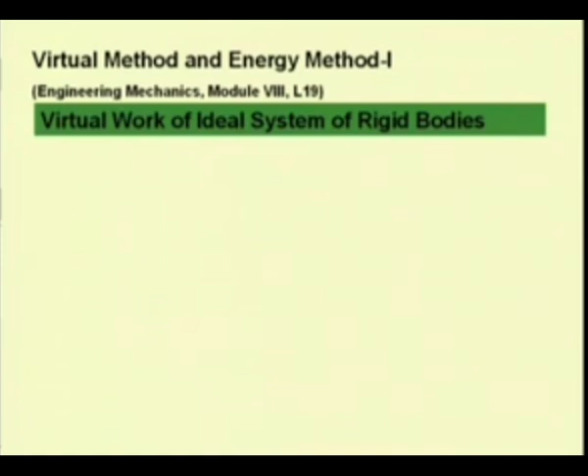Module 8, lecture number 19 of the engineering mechanics course. Before taking up some problems, we will see how to define what we call as the degree of freedom of a system, which defines the number of independent coordinates required to define the position or configuration of a rigid body or a system of connected rigid bodies.

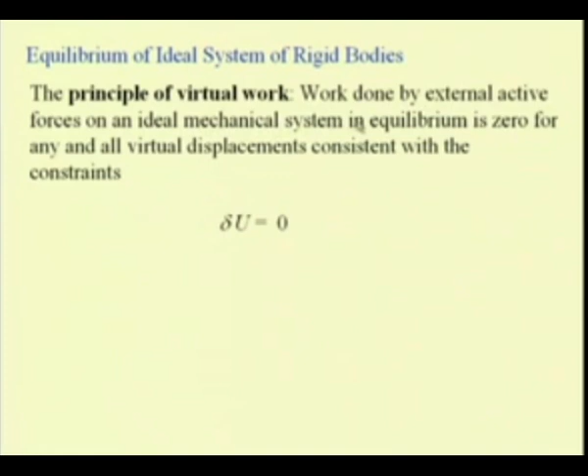Before going into the details, let us recapitulate what we studied in the last lecture. We defined the equilibrium of ideal systems of rigid bodies, as systems which do not absorb energy and also do not dissipate energy because of friction. The principle of virtual work as applied to the ideal system of rigid bodies is that the work done by external active forces on an ideal mechanical system in equilibrium is 0 for all virtual displacement consistent with constraint, that is delta U equals 0.

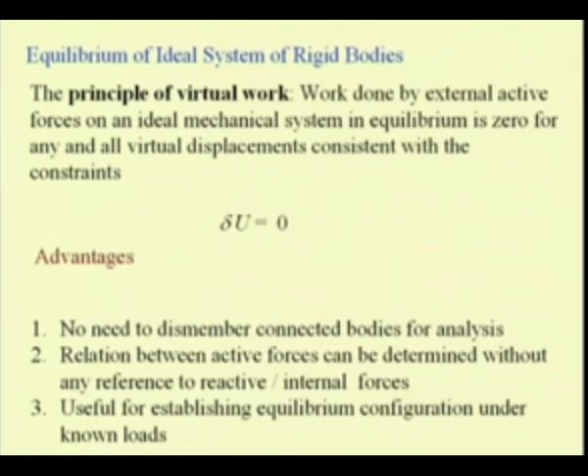We also saw that it is not needed to dismember the connected bodies for analysis. The relation between active forces can be determined without any reference to the reactive or internal forces. That means we do not need to find the reaction forces also, and it is useful in establishing equilibrium configuration under known loads. So we will see some problems in order to realize these advantages.

You should note that we are neglecting friction because we are idealizing the system, assuming that friction does not exist. In case friction is appreciable, it does work and has to be included in the expression. In this case, one has to dismember the bodies to determine friction, and the advantage of the virtual work method is lost, because to determine the internal forces we have to dismember, and once we do that, the advantage of the virtual work method is lost.

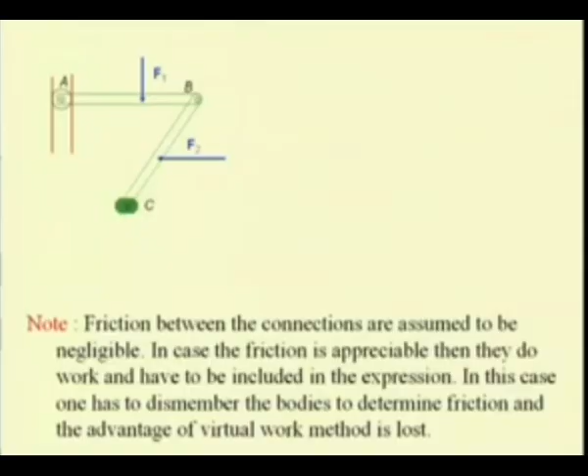Now, let us define what we mean by the degrees of freedom of a system. The degree of freedom is nothing but the number of independent coordinates needed to specify the configuration of a system completely.

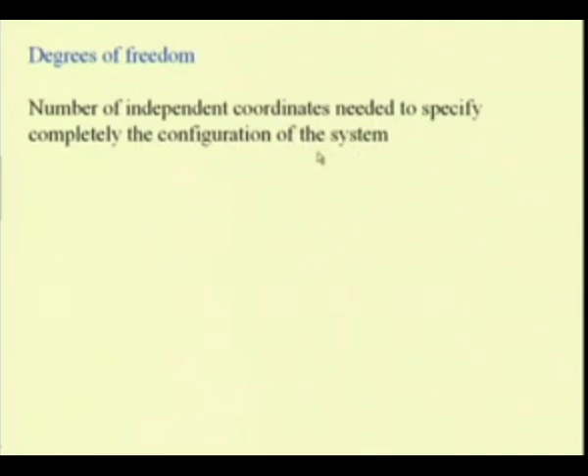Let us take one example of a 1 degree of freedom system, where we define the configuration of the system completely by specifying only one coordinate. Here you see a link BC pinned at C and the link AB connected by a roller at A, with some external forces acting on this system causing the system to undergo displacement.

If we assume that this system undergoes displacement consistent with the constraints, then point A can move along the roller in this direction and take up a new position. Since this is constrained at point C, point B traces a circular path, so any new position B prime will be such that this virtual displacement, because of the application of external forces, is consistent with the constraints. That means point A moves along this direction and this link undergoes a pure rotation.

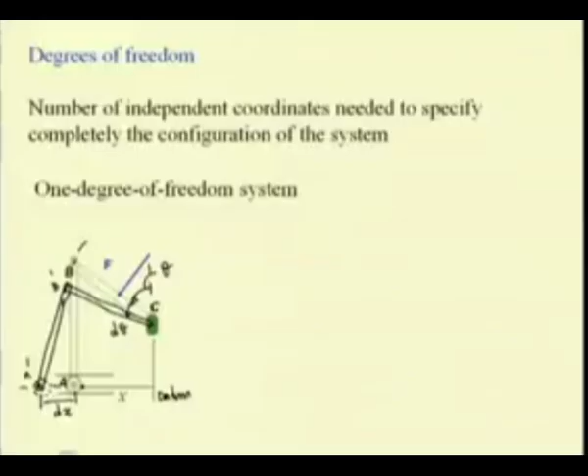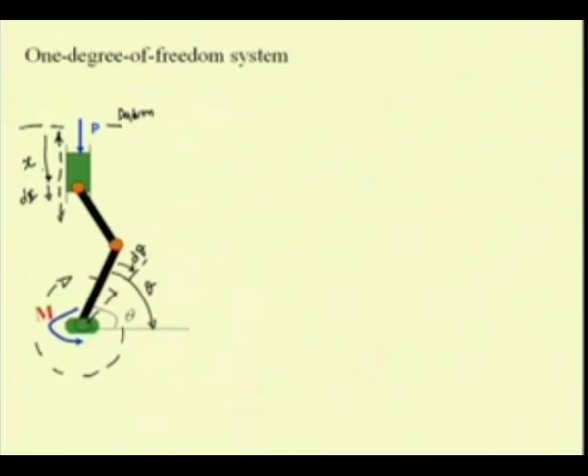So, for any displacement d theta of this link, the displacement dx is known. So, either by specifying theta or specifying x, I can completely define the configuration of this system. So, again this is a 1 degree of freedom system.

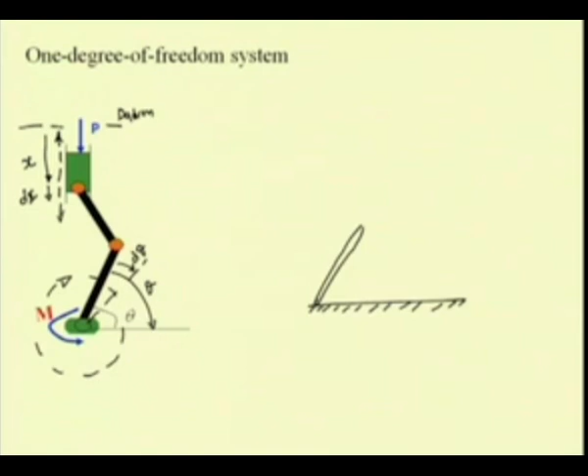We can see another example, which is a 4 bar mechanism. What we call a 4 bar mechanism, where position A is fixed, and A and D, these 2 points are fixed, and this link AD is also fixed, because its orientation as well as the distance between A and D is fixed. So, if this is my crank or input link, its angle is theta, and these link lengths are constant because these links are rigid.

So, if this undergoes a displacement to a new position B prime with d theta, then the new orientation, say C prime, all the other angles - let me call this angle theta 1 and the angle of this link theta 2 - we can write in terms of this angle theta. So, any displacement d theta will result in displacements d theta 1 and d theta 2, which is possible to write because these link lengths are constant. So, these two angles can be determined in terms of theta, and again this is a single degree of freedom system.

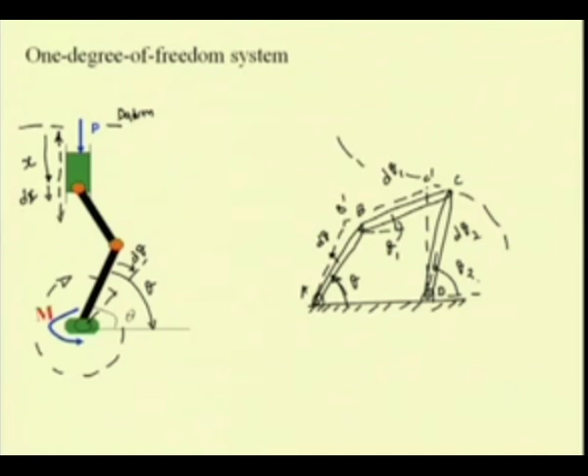So, let us see another example. Here what you see is a 2 degree of freedom system. It is similar to an articulated arm like our arm. So, the position of this end A, or the end effector in case of a robot, or our hand in case of a human hand, can be positioned by the rotation of this link and the rotation of this link - that is what you see here, the two links OB and BA. Various forces are acting, like the self weight of these members and some other forces.

The configuration of this link system can be defined by two coordinates, say theta 1 and theta 2. So, we call this a 2 degree of freedom system, because you need two independent coordinates - theta 2 cannot be expressed in terms of theta 1 - so we need specific values of theta 1 and theta 2 in order to obtain the particular position A.

So, any virtual displacement consistent with the constraint, B prime and A prime, has to be defined by defining both d theta 1 as well as d theta 2. So, we see that this system can be uniquely defined if we specify the two coordinates theta 1 and theta 2, and thus we call it a 2 degree of freedom system.

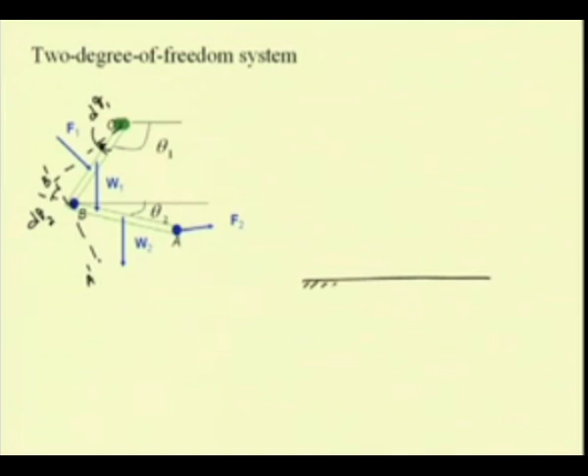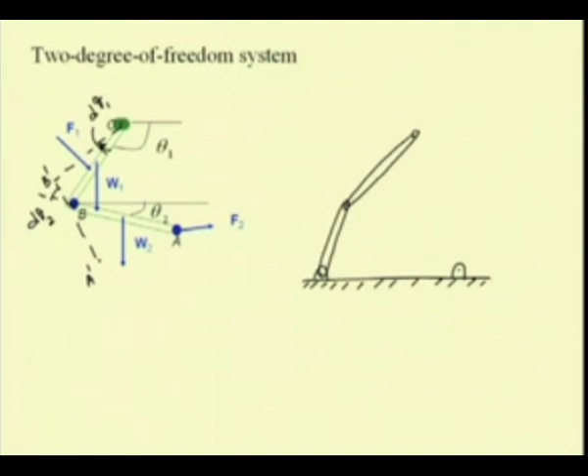We can have an example of a 5 bar mechanism, this way we defined the 4 bar mechanism. So, and say this is the end effector, and this is trying to generate some path. In this case, if this is one input link, I say theta 1, these link lengths are fixed, and this is L5, also fixed both in orientation as well as length.

And in order to completely define this configuration, you have to define one more angle, say theta 4. Then these two angles, theta 2 and theta 3, can be determined in terms of theta 1 and theta 4. So, this is again a 2 degree of freedom system, where the configuration is completely defined if we define theta 1 as well as theta 4.

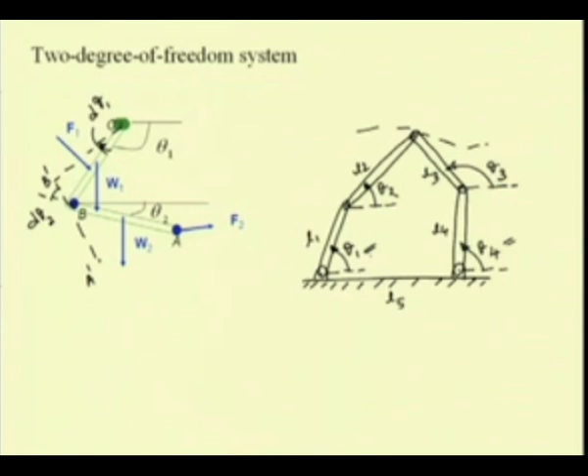So, these are some examples of 2 degree of freedom systems, and then we have multiple degree of freedom systems, where the degrees of freedom could be as large as n, and the analysis of such systems becomes more and more complicated as we increase the degrees of freedom. So, initially we will limit our discussion to single degree of freedom systems, and maybe we will see some problems on 2 degree of freedom systems also.

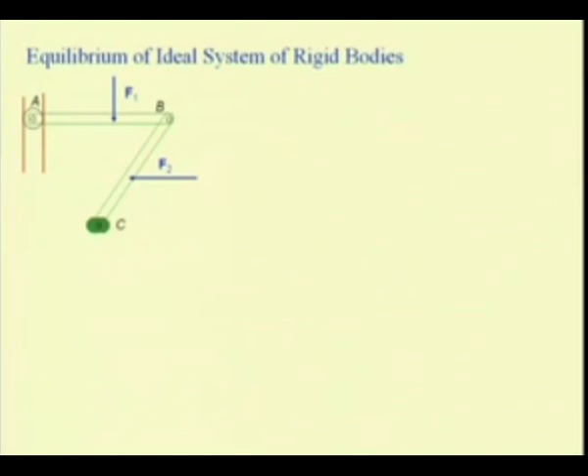So, let us now define this equilibrium of ideal system of rigid bodies. In order to solve such problems, the first step is to construct what we call as the active force diagram, where we depict only the forces that do the work. We do not show the reactive forces and the internal forces.

The way we have constructed free body diagrams for solving the equilibrium problems, here we construct this active force diagram, where we only show those forces which constitute or which do work when a virtual displacement is undergone by a system.

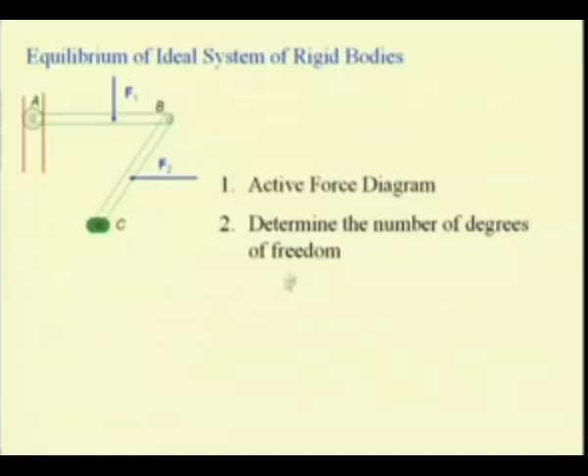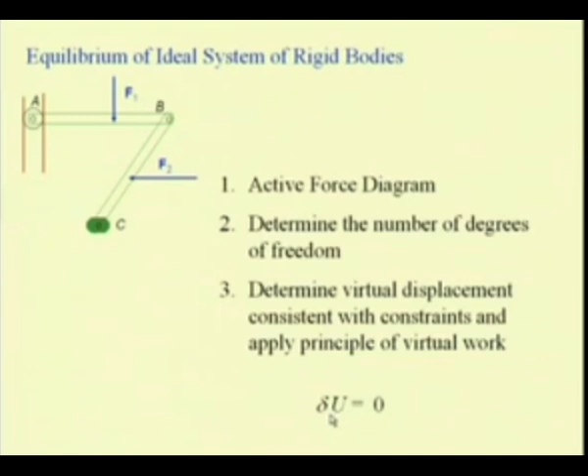Then we determine the number of degrees of freedom, define the datum, and determine the virtual displacement consistent with the constraints, and then we write the principle of virtual work equation, that is, we define the virtual work and equate the sum of all the virtual work to 0. That is this equation, delta U, the virtual work has to be 0.

So, for such multiple degree of freedom systems, a virtual displacement is given to each individual coordinate. That means we have to give one virtual displacement d theta 1 to this coordinate theta 1, and another virtual displacement d theta 2 for this coordinate theta 2, and we apply the principle of virtual work for each of these.

So, for each virtual displacement, say for a small angular displacement delta theta 1, the virtual displacement is delta theta 1, and this is delta theta 2. For each of this, we define the virtual work and equate it to 0, thereby resulting in n equations for an n degree of freedom system, and it is possible to solve for n unknowns in such a system.

But initially, let us limit the discussion to single degree of freedom system. So, these are the various equations: delta U theta I, where I is 1, 2, etc. up to n, the degree of freedom of the system. So, each of this results in one equation. We have n equations for the n degree of freedom system.

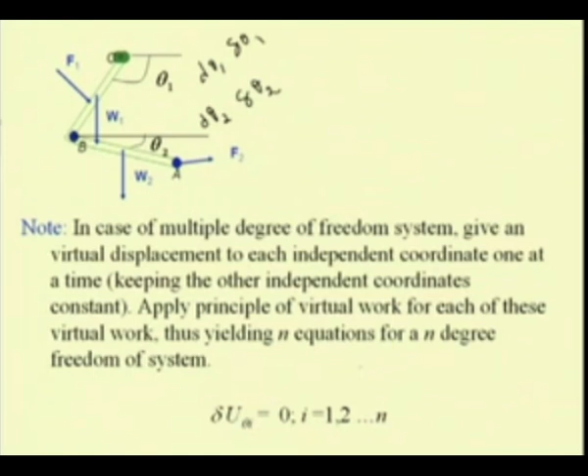Let us consider one example and see how we apply this method of virtual work to the system of connected rigid bodies. In this case, we are taking an ideal system of rigid bodies.

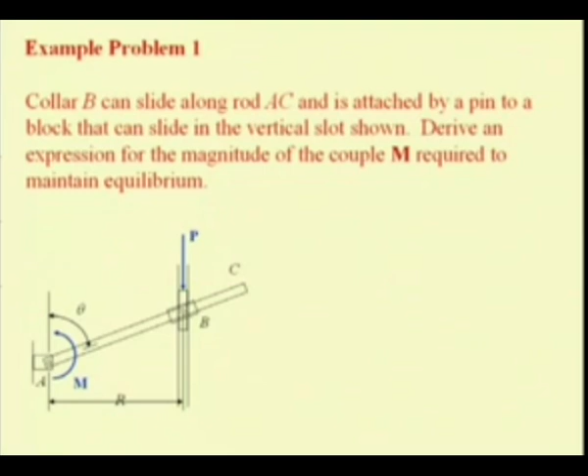So, let us try to solve this problem by the method of virtual work. So, what will be our strategy? We will first create the active force diagram. Here in this case we have these two forces, that is the P and the applied moment M, which do work for any virtual displacement consistent with the constraints.

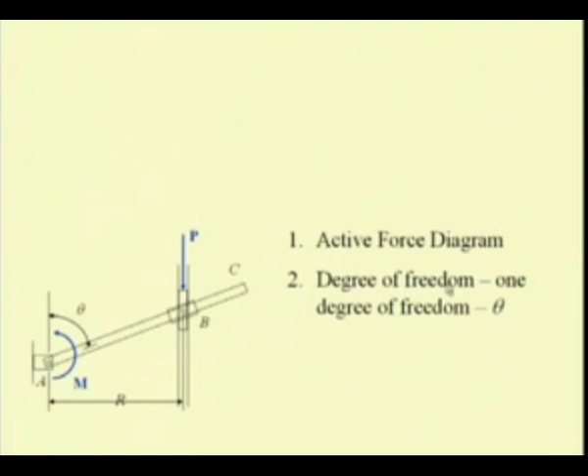Now, let us define the degrees of freedom of this system. It is a single degree of freedom system. That means, if we define this configuration by this angle theta, then the position of this point B where the other force P is being applied is uniquely defined. As this angle theta changes, this point B moves along this slot and its new position is uniquely defined.

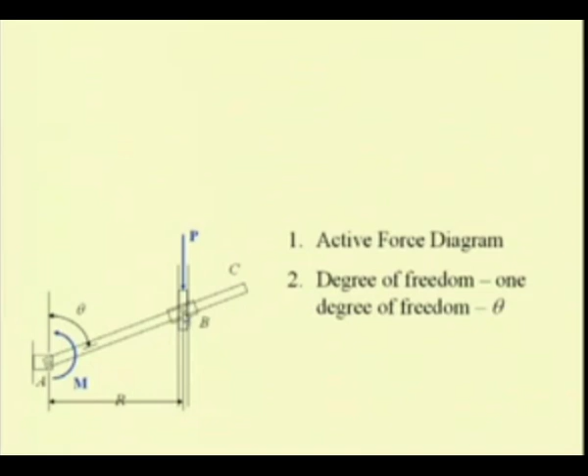This distance r is known, which is a fixed distance, that is the point A and this slot are located at a distance of r, which is fixed. So, by uniquely defining the angle theta, it is possible to find the position of this point B, and thus it is a single degree of freedom system.

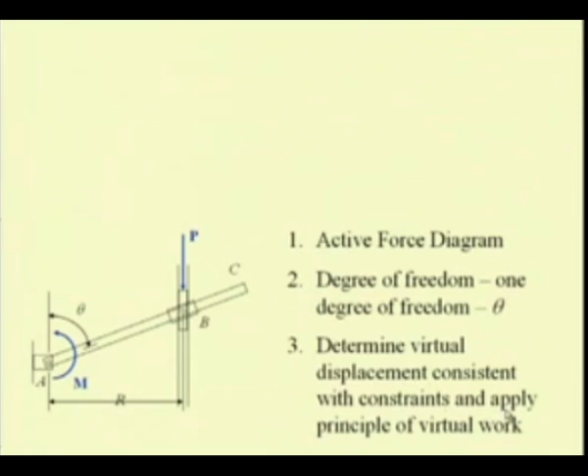Now, we will define the virtual displacement consistent with the constraints and then apply the principle of virtual work. So, let us first construct the active force diagram showing also the datum and the coordinates.

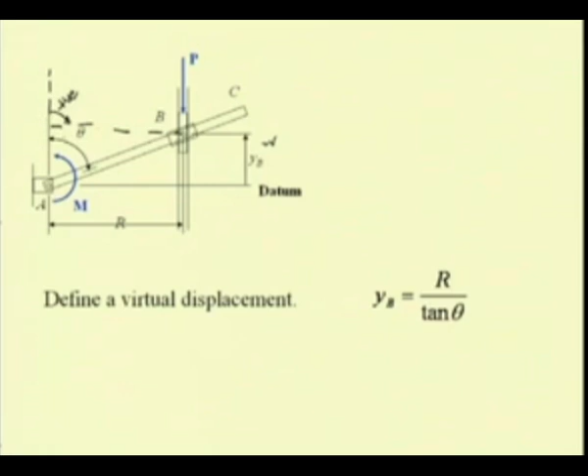Because we have this r as this distance and yb as this distance, and from this right angle triangle we can write this relation.

Now let us define the virtual displacement by differentiating this equation. So we have delta yb equal to the differentiation of this tan theta, which is minus 1 by sin square theta delta theta. So that is what we have written here: delta yb is equal to minus r times delta theta divided by sin square theta.

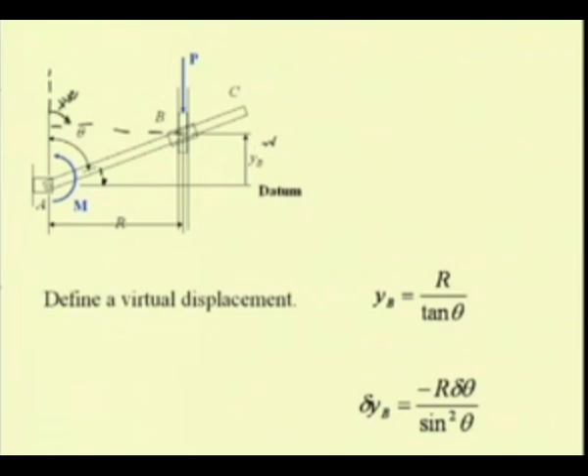This negative sign indicates that if the angular displacement theta moves in the positive sense, meaning delta theta is positive, the link takes a new position in this direction, this point b moves down, or the distance yb shrinks. So the virtual displacement of this point b is in the negative sense. This negative sign indicates that the virtual displacements of delta theta and delta yb are negative, which is also seen from this picture.

Now let us express the total virtual work done by these forces and set this virtual work to 0. So what is the virtual work? That is delta U equal to 0. We have this F dot delta r, and the work done by the moment delta U is M delta theta. This work is positive if both the moment and delta theta are in the same sense, and this is negative if they are in the opposite sense.

So we have the work done by this force P, which is in the negative direction, because this is in the negative y direction, as we have taken this as the positive y and this as the positive x. So the sign of this is minus P because the force vector is in the negative y direction. Minus P times delta yb is the work done by this force P.

Then let us see what is the work done by the moment. Here the positive displacement delta theta is in this direction, and the moment is in the other direction, so the sign of this is negative. We have minus M delta theta, because the moment and the positive virtual displacement are in the opposite sense. So the angle between these two vectors is pi, and cos pi is minus 1, so we have minus M delta theta.

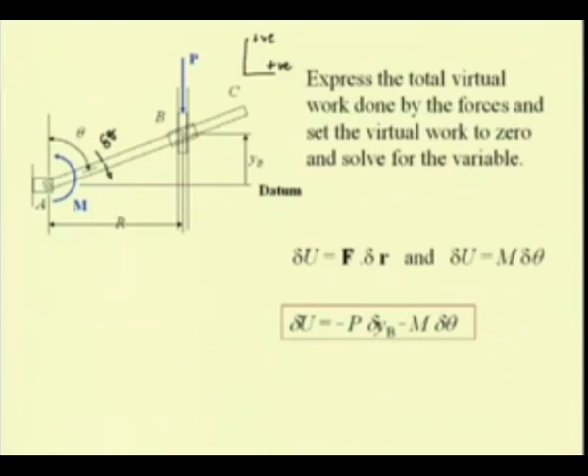So let us expand this by substituting the values of delta yb and equate this term to 0. We have this force P times delta yb, which is r by sin square theta delta theta, and the negative signs cancel, so we have plus P r divided by sin square theta delta theta, plus the work done by the moment, which is minus M delta theta, and this has to be 0.

So from this equation we can now remove delta theta, because virtual displacement is not 0. So the other term has to be 0, and from that we get the relation between the applied moment and the force. So if we know the distance r and the configuration theta, we can find the value of M with respect to this force P.

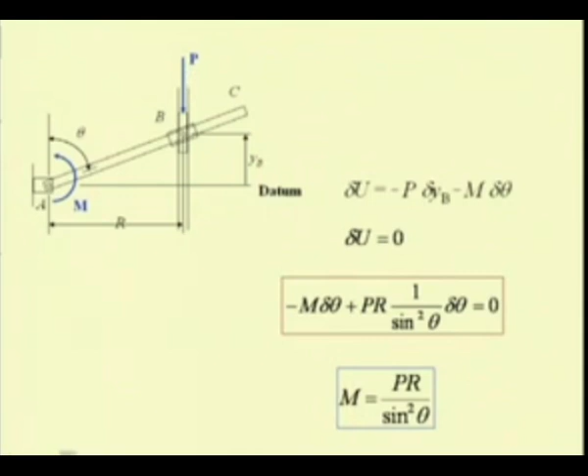We are assuming that the negative work of friction is negligible in this case, so we are neglecting the work done by the friction.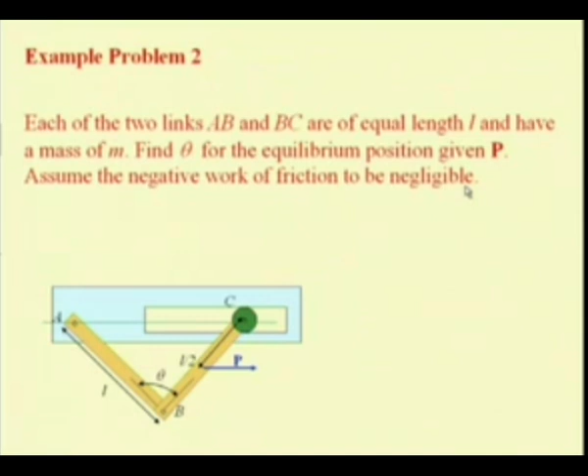So again our strategy will be to construct the active force diagram. Here what are the various forces that are active? It is the self weight of these links, mg, the weight of link AB and the weight of link BC, which act through their center of mass, at a distance of L by 2 from point A along link AB, and similarly L by 2 along link BC from point C. And we have this applied force P which is acting through the center of mass of link CB. So these are the various active forces doing virtual work if this system undergoes a virtual displacement.

This system is clearly a 1 degree of freedom system, where I can define the position of this point P with respect to a datum. Say I fix this as my datum.

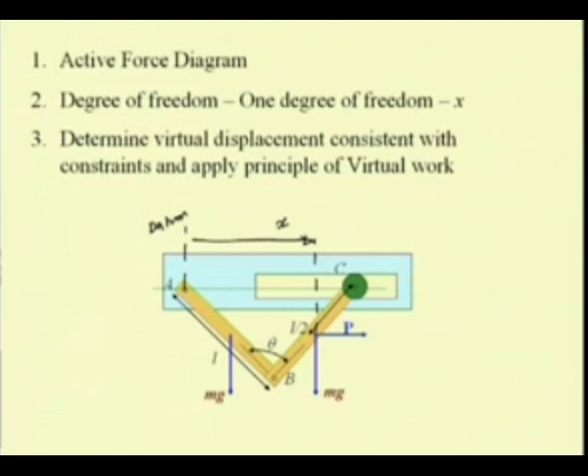So either I can have the configuration specified by this distance x, or I can specify the configuration by this angle theta. Then we determine the virtual displacement consistent with the constraint and apply the principle of virtual work.

Let us first construct the diagram showing the active forces and then the coordinate that specifies the configuration, that is x, which is the center of mass of this link BC with respect to this datum passing through the pin connection at A. So let us now write this distance x with respect to this angle theta.

We also would like to know the position of the center of mass of this link AB as the system takes new configuration, because we are interested in computing the work done by these active forces.

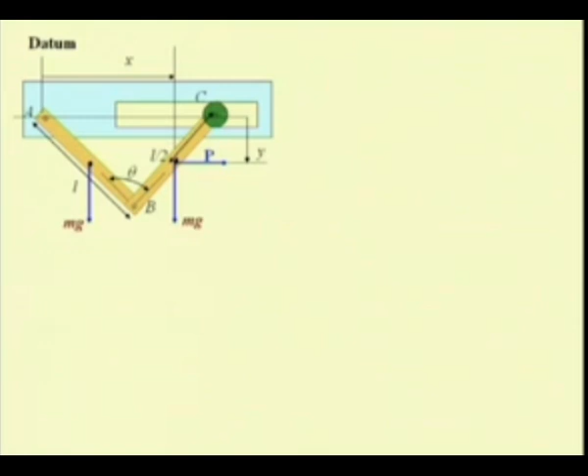So we are interested to know how this point from where this force mg acts undergoes displacement as this x changes, and also this point where this mg as well as p is acting, how this point undergoes the virtual displacement consistent with these constraints. So first we define this virtual displacement.

First let us relate this x with this theta. So we have this x as this distance plus this distance. This distance is nothing but L sin theta by 2, because if this is angle theta and these two links are having equal length, then this angle is theta by 2. So we have this distance as L sin theta by 2, and this distance will be L by 2 times sin theta by 2.

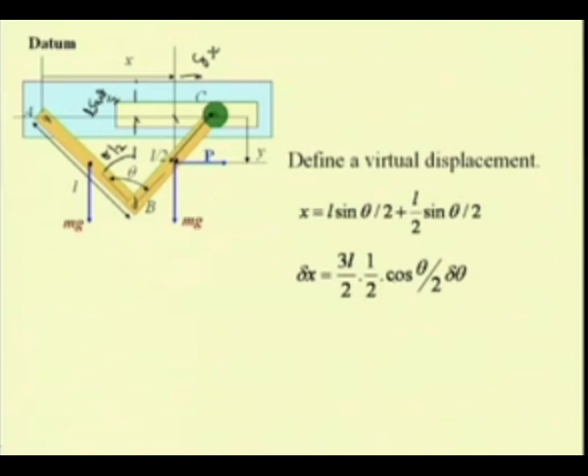Now we can define this virtual displacement delta x that this point undergoes in the x direction as delta x, which is the differentiation of this, equal to 3L by 2 times half cos theta by 2 delta theta. So this is the differentiation of these quantities.

Now let us see how this vertical distance of this point moves as this virtual displacement delta x is undergone. So we define from this datum y and the positive sense. Here this is the positive virtual displacement for x, and here this is the positive virtual displacement for y direction.

So this distance y is equal to L by 2 cos theta by 2, because this is L by 2 and this angle is theta by 2, this angle is theta by 2, and so we have y as L by 2 cos theta by 2, and from this we get this virtual displacement delta y as minus L by 2 times half sin theta by 2 delta theta.

So these two relations state that as this angle increases, this x also increases, but as this angle increases, the virtual displacement of this point in the y direction is in the negative sense. That means this point moves upward as this link expands, or as theta expands.

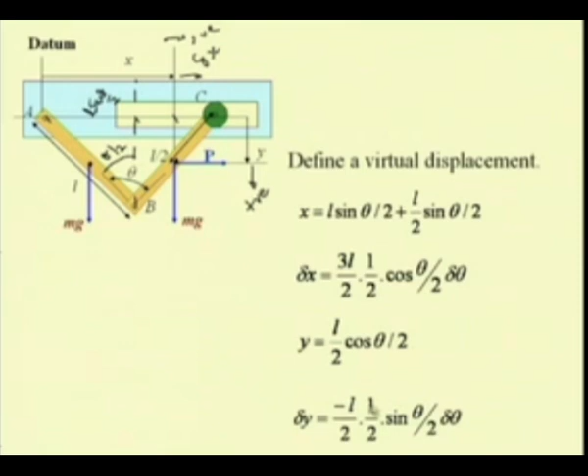The point of center of mass of these two links actually moves upward, or in the negative sense of the positive virtual displacement that we have considered. That is why we get this negative sign, and that is the physical significance of this negative sign from this differentiation to this problem.

Now let us express the total virtual work done. So delta U is F dot delta r, and the virtual work done by the moment. In this case there are no applied moments, so we have only the work done by these various forces.

This is equal to the work done by this force P, which is in the positive x direction, times delta x, plus these two forces which are also in the same direction as the positive sense that we have taken. Since these forces are in the same direction, that is mg is in the positive sense of delta y and P is in the positive sense of delta x, we have both these works as positive: P times delta x plus 2 times mg delta y, the work done by these two forces.

Now let us substitute the values of delta x and delta y in terms of delta theta.

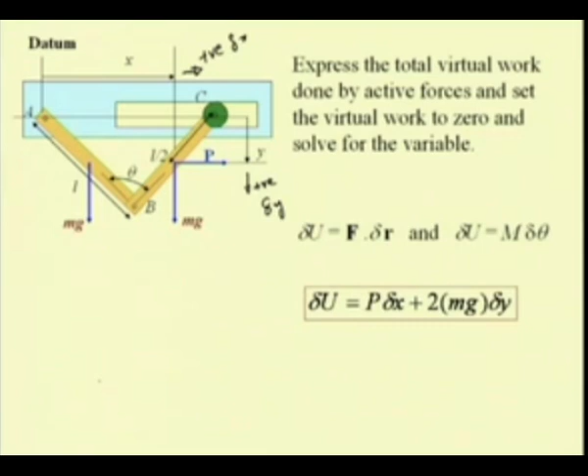We have this equation which we equate to 0. So we have P times this quantity delta x plus 2mg times delta y, which has a negative sign with respect to delta theta.

If we simplify this equation, we know that delta theta is not 0 because the virtual displacement is not 0. So this other component, that is P times 3l/2 half cos theta/2 plus 2mg times minus l/2 sin theta/2 into half, should be 0, and when we simplify it, we have tan theta/2 equal to 3P/2mg.

So if we know this force P and the mass of these links, then we can determine this angle theta as 2 times tan inverse of 3P/2mg.

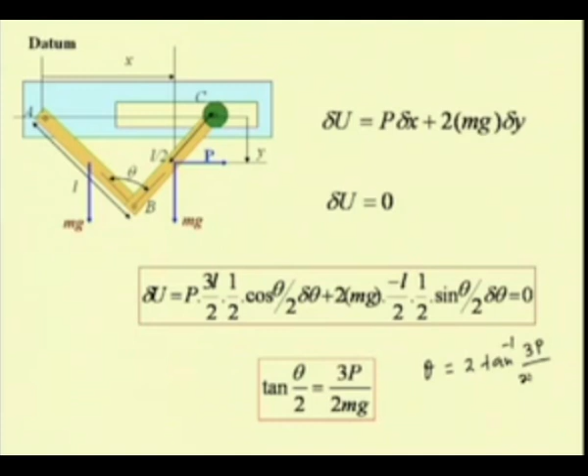Now let us take an example where we have some elements which can absorb energy. In all the previous examples, we saw that we are neglecting friction and also we are not having any elements that can consume energy by absorbing them either by elongation or compression.

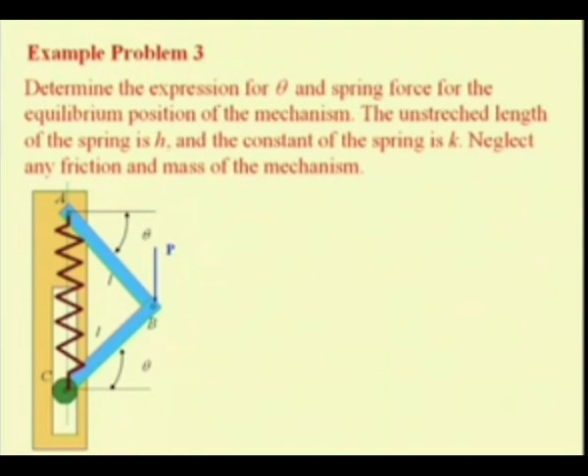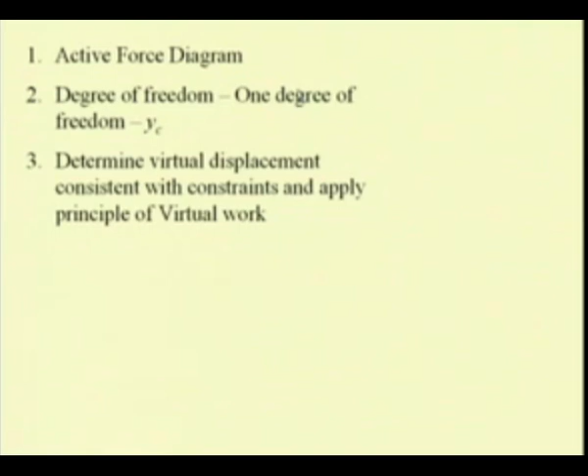So what will be our strategy? We will first construct the active force diagram, and then we will find the degree of freedom of this system. This is a 1 degree of freedom system,

because the position of these links can be specified uniquely if we specify the y coordinate of this point C. So if we take this as our datum, and this as the positive delta yc, the direction of the positive virtual displacement, and if we specify this value yc,

then the system configuration is uniquely defined. And since we have seen that the spring element can absorb energy when the system undergoes virtual displacement, we remove that from the element to idealize the system. So we represent the spring by its force on this mechanism at this point C. So this force F is the spring force.

So if the spring is elongated because of this applied force P, then it will tend to pull this point C towards A, and thus this direction of the force is for the condition when the spring is elongated. If it is compressed, then this force will be downward.

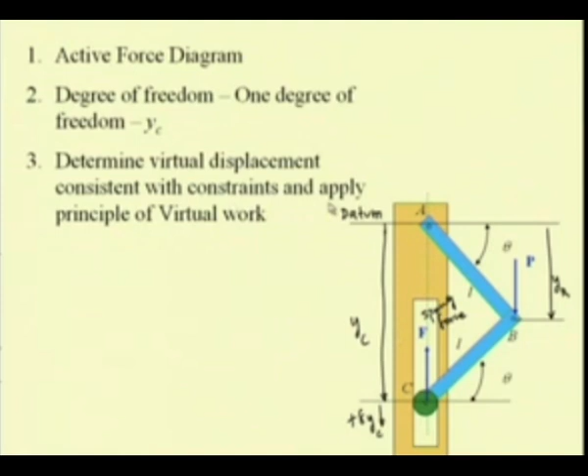Then I determine the virtual displacement consistent with the constraints, that is, it is pinned at A, and here this point C can move in the vertical direction along this line AC, and then I apply the principle of virtual work. So let us proceed.

First we have defined this datum, and we have defined this coordinate of this point as yc. This coordinate yc is equal to the unstretched length, because this force F is representing this spring which was there, and if this is the unstretched length of the spring, then this yc is equal to the unstretched length of the spring plus the stretch of the spring, that is S.

So the length of the spring for this configuration, which is yc, is equal to this unstretched length plus this stretch of the spring.

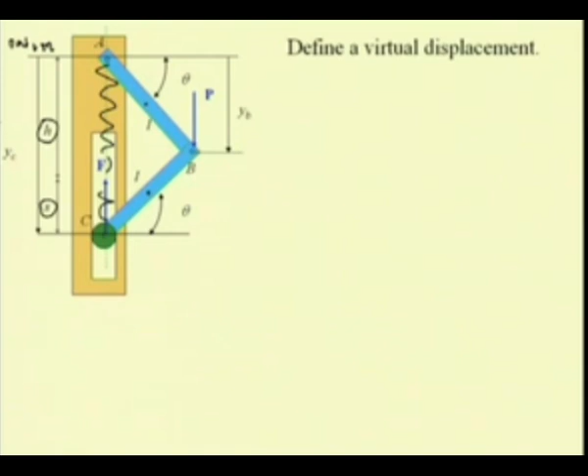We also define this coordinate of B, yb, with respect to the datum where this force P is applied. Since we are assuming massless links, we do not need to consider the work done by the weight of these links. If we consider it, then we have to also find the coordinate of the mass center of these links with respect to the datum, because as the system undergoes virtual displacement, these points will also move and we have to find the work done by the self weight of these links.

In this case, we are assuming that the masses are negligible. Since we have defined the coordinate of point C and point B with respect to the datum, and we have seen that all these forces are vertical, we only need to define these vertical coordinates using the angles from symmetry. Since the lengths of AB and CB are equal, these two angles will be the same, equal to theta.

Let us now write these distances in terms of angle theta. We have YC as 2 times this distance, which is L sin theta. This distance is L sin theta, this being the length of link AB, and this angle is theta, so this angle is also theta. So we have this as L sin theta, and YC is equal to 2 times L sin theta.

Now we can differentiate this to get the virtual displacements. Delta YC, the virtual displacement in the positive sense, is equal to 2L times the differentiation of sin theta, which is cos theta delta theta. That means as this angle theta increases, distance delta YC also increases, so we have a positive correlation: delta YC and delta theta are positively related. We can see both mathematically and physically to verify this fact.

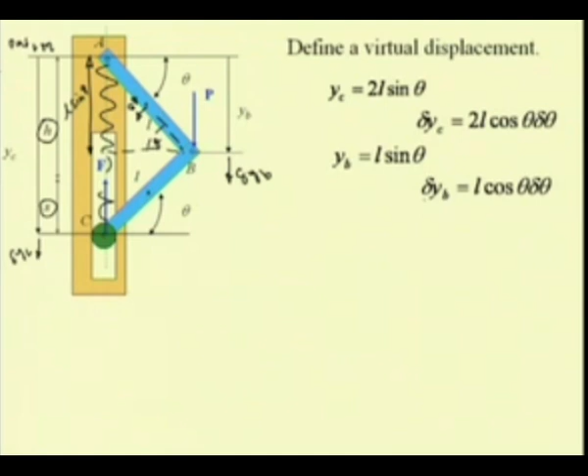Now let us define this coordinate YB. We have YB equal to L sin theta, this length times sin theta, which is this distance. If we differentiate it, delta YB is equal to L cos theta delta theta. Again we see that this positive virtual displacement delta YB and the positive virtual displacement delta theta are positively correlated. As theta increases, this point moves down, so delta YB and delta theta are positively correlated. Now we have defined the required virtual displacements for point B as well as point C.

Now let us see what will be the elongation of this spring, that is distance S, for this particular configuration. We know that S is equal to YC minus H, the unstretched length of the spring. So S is equal to YC minus H, and YC has been found to be 2L sin theta, so S, the elongation, is 2L sin theta minus H.

From this we can now determine the force F that will act at point C, because we know the spring force F is equal to K times S, where K is the spring constant and S is the elongation of the spring. So we get F equal to K times 2L sin theta minus H. This is the force that acts at point C for this particular configuration.

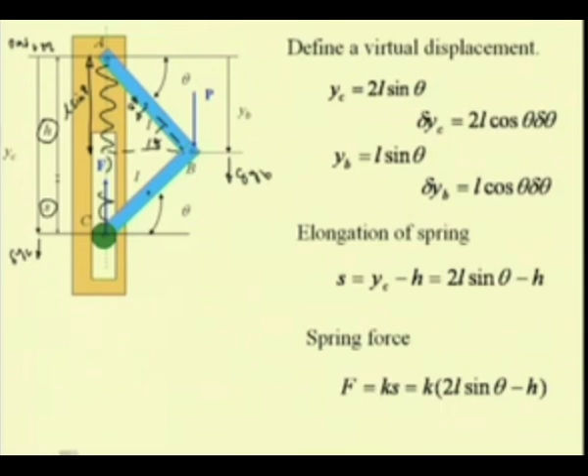Now we can express the total virtual work done by these active forces, that is force F and P, and set this virtual work to 0. The virtual work is delta U equals F dot delta R, and the work done by a moment is delta U equals m delta theta, but here we do not have any active moments, so that virtual work term is not involved — only the virtual work done by the forces.

So we have two forces F and P. We write P times delta YB — both are in the same direction, that is the positive virtual displacement of point B and force P are in the same direction, so their work is positive: P times delta YB. Here the positive virtual displacement is delta YC and the force is F, which are in the opposite direction, so the work done by force F for virtual displacement delta YC is negative: minus F times delta YC.

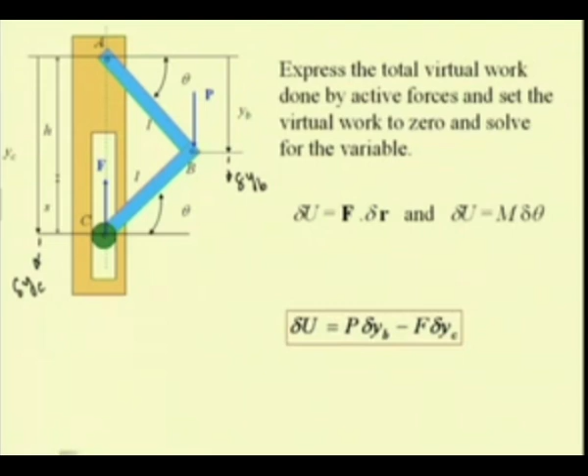Now we can equate this to 0 for equilibrium. So we have P times delta YB, which is L cos theta delta theta, minus F times delta YC, which has been found to be 2L cos theta delta theta, and we equate this to 0. From this we get that the force of this spring is equal to P by 2, and we already have the relation that the spring force equals the spring constant times 2L sin theta minus h.

From this we can find the position sin theta, which gives the unique configuration of this link, that is theta, which is equal to sin inverse of P plus 2 K h, divided by 4 K L.

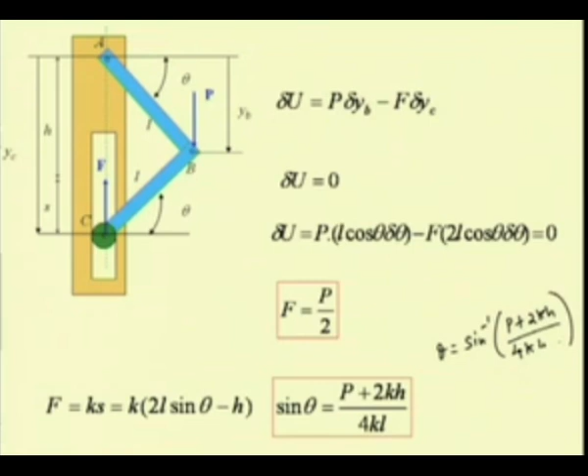So, these examples illustrated how we apply this method of virtual work to the system of ideal rigid bodies, where we neglect friction, and if there are any members that can absorb energy by elongation or compression, the same can be removed from the system and replaced by an equivalent force, and we can apply this principle of virtual work to determine the equilibrium conditions or any unknown forces that are involved.

Hydraulic cylinder that exerts a force at this joint in order to keep this platform at say this height of h. The various other dimensions are given to you.

If you would like to solve this problem by the conventional method of force and moment equilibrium equations, then you will see that it is not possible to find this force C from this given data, because we do not know the position of this mass in this platform. That means its horizontal position with respect to these joints or with respect to the edges of this platform is not known. So, in this case we see that this information is needed in order to find this force C if you would like to use the force and moment equilibrium equation.

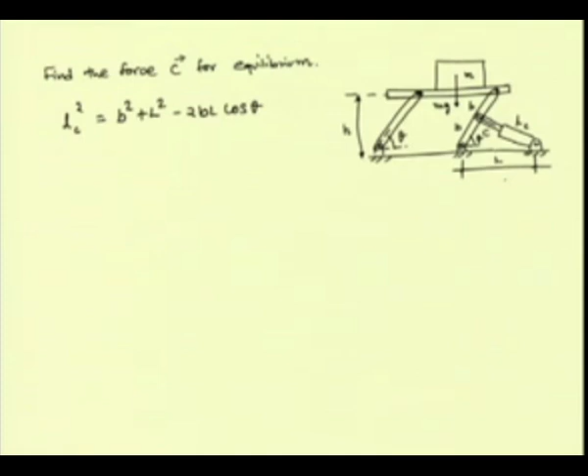So, now we can write for this height of this platform in terms of this angle theta. Again, we see that this system is a single degree of freedom system, which can be defined uniquely by this position theta. So, the height of the platform is equal to 2b sin theta. So, these measurements are positive from this axis, so it is positive in this way.

So, let us now define the virtual displacement by differentiating these two equations. From the first equation, we have 2 LC delta LC is equal to 2 BL sin theta delta theta, because these two things are constant, that is B square and L square. So, we have from this differentiation of this first equation the expression for the virtual displacement delta LC.

Let us differentiate the equation for the height. So, we have delta H is equal to 2b cos theta delta theta.

Now, the work done by the weight and the work done by this force can be computed. When the link is displaced by a virtual displacement delta theta, this mass is raised or lowered by this amount, that is delta H, and the length of this link changes by this quantity delta LC. So, these terms will help us derive the virtual work for the weight and the hydraulic force at this joint.

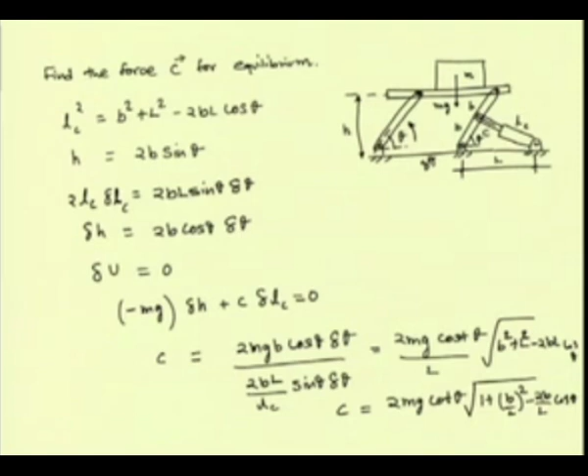So, this expression now gives the value of the force that has to be supplied by the hydraulic cylinder at this joint in order to support this weight at this height. So, we see that the method can be conveniently applied to such systems where it is difficult or not possible to provide detailed information about, say, the location of this body, etc., and with certain minimal information it is possible to go ahead with solving for the equilibrium or solving for the unknown forces.

So, in the next lecture we will see some systems which have also friction. All these analysis we have discussed is for systems without friction. So, we will take up in the forthcoming lecture systems which have friction.